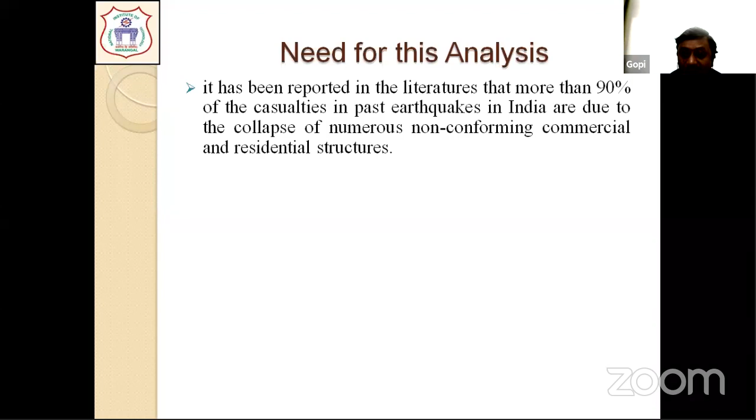We have already seen that India has experienced so many devastating earthquakes in the past, and these earthquakes have caused a lot of casualties, and that is the reason why we are very much focusing on this particular direction in order to create a safe design structure.

The only way that we can minimize this is by ensuring code compliance for new constructions, and we need to look at how our existing structures are behaving. When we are able to ascertain the performance of our existing structure, then we can decide whether we need to rehabilitate it, or retrofit it, or how to bring that structure back to the functional level according to the code of practice existing on that date when we take this analysis.

The reason here is, when we look at RC buildings, we generally have different types of RC buildings existing in urban habitat. The reason for different types is because of the inherent functional benefits that are provided by the provisions given in the RC buildings.

Say, for example, if we think of irregularities, we have different types of irregularities being introduced. Why I'm saying irregular is because it is not normal. For example, we have a provision of having an open ground story in most of our apartment complexes. This open ground story adds to a functional level of creating a parking space. But if this open ground story has not been properly taken care of while designing, this leads to a disaster during an eventuality. That we all need to understand.

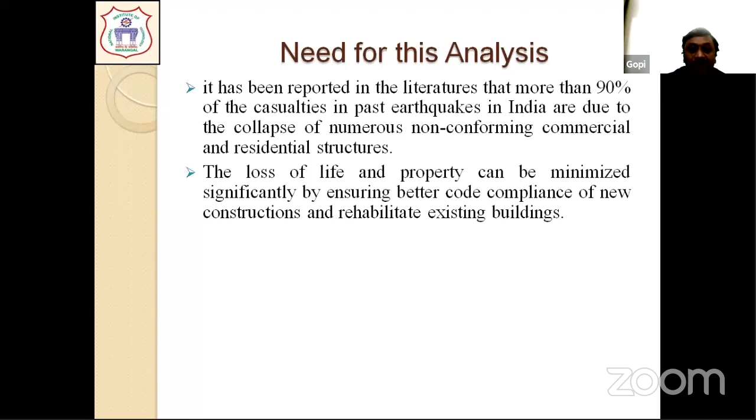designing these particular aspects. That is the reason why we are looking at what are the various analysis approaches, how we are trying to look at the behavior of these particular structures, and how we can project so that we can create awareness among people regarding the severity of this particular aspect, so that an awareness is created, and then the codal provisions can be clearly incorporated or implemented even at the site level. So that is the reason why this presentation has been framed.

So the fragility of the structure, whenever I say fragility, fragility happens to be a conditional probability. Fragility is only a probability density function which displays a conditional probability of a particular failure with respect to a parameter that is describing the failure. It is only a conditional probability.

Now coming on to the RC buildings or any structure, the response quantities for those particular structures can be acceleration, velocity, displacement, spectral acceleration, or spectral displacement. So whenever we try to describe the behavior of that particular structure, or when we try to explain the probability of exceedance, that is the way we are going to quantify the failure.

So when we are trying to explain the probability of failure with respect to certain response quantities, we are going to get a probability density function. That probability density function is nothing but a conditional probability of exceedance with respect to a particular value. So this way we can try to describe how the failure is going to happen with respect to that particular phenomena. Say for example, if we have an RC building, we may have certain properties.

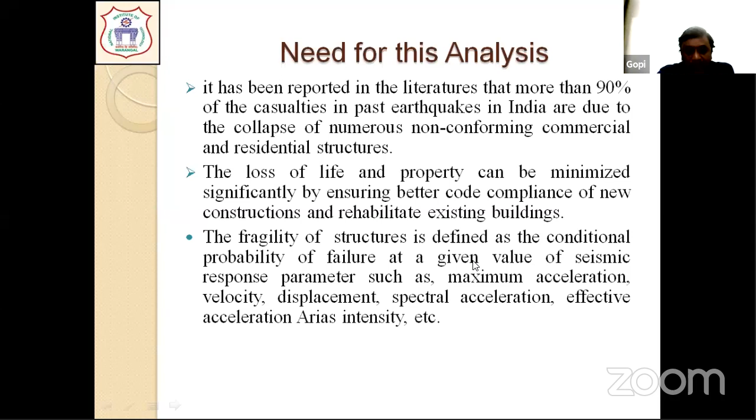Coming on to fragility functions, we've said that fragility functions happen to be conditional probability functions. So this fragility analysis is a probabilistic tool to assess the performance. What is the outcome of this analysis? We get a probability curve quantifying the damage phenomena, because we are trying to describe the failure in terms of damages incurred on an RC building. So it describes the failure in terms of a damage phenomenon.

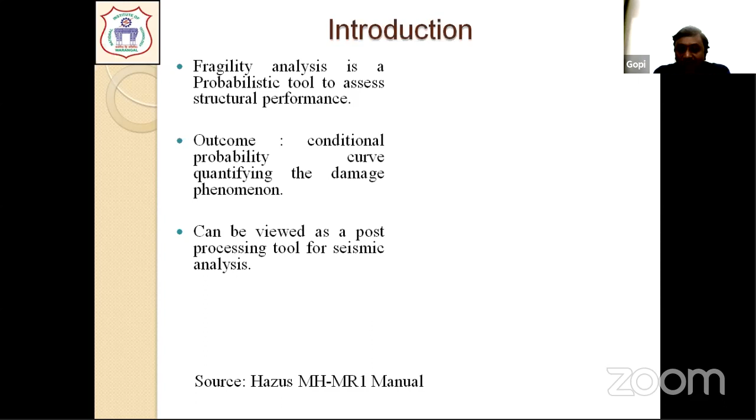So we can visualize this as a post-processing tool during seismic analysis. Please understand, it is a post-processing tool, so this tool is always dependent upon the analysis capability given to it. Otherwise, this tool is not as accurate unless the analysis procedures are accurate, and the accuracy always depends upon the type of analysis being used.

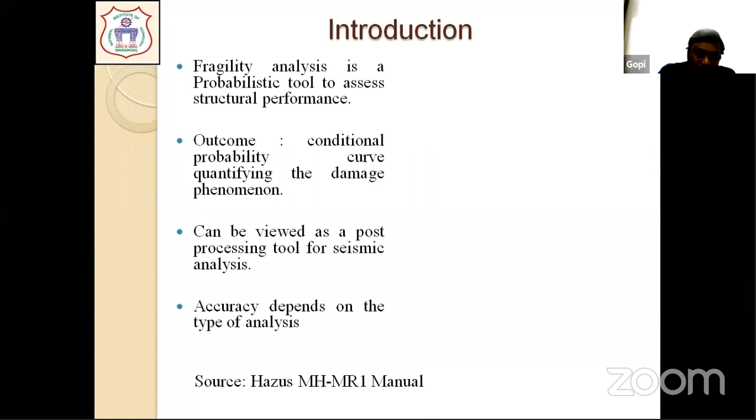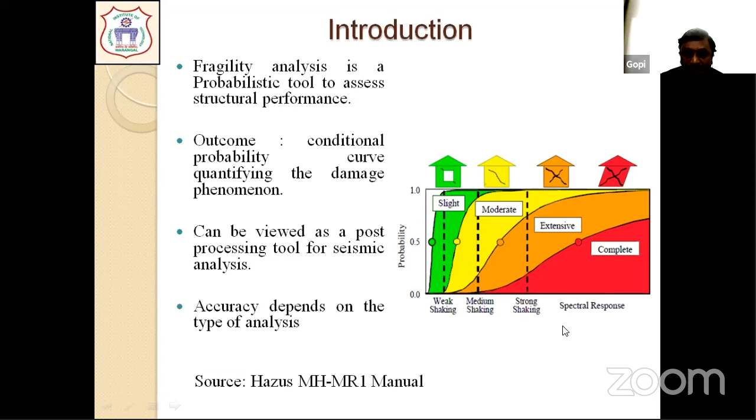The first and foremost step lies in hazard analysis. Whenever we select a particular location for analysis, we need to first ascertain the seismicity of that location, studied using either a deterministic seismic hazard analysis or a probabilistic seismic hazard analysis. We do this analysis with respect to certain intensity measures like peak ground acceleration, peak ground velocity, spectral acceleration, or spectral velocity - certain intensity measures will be framed.

Next, we are going to carry out the response analysis. That means we are characterizing the force - please understand, we are characterizing the force - and our response spectra represents the force at that particular location. Response spectra with respect to certain soil characteristics represents the force, and when we have that force, we can get the response.

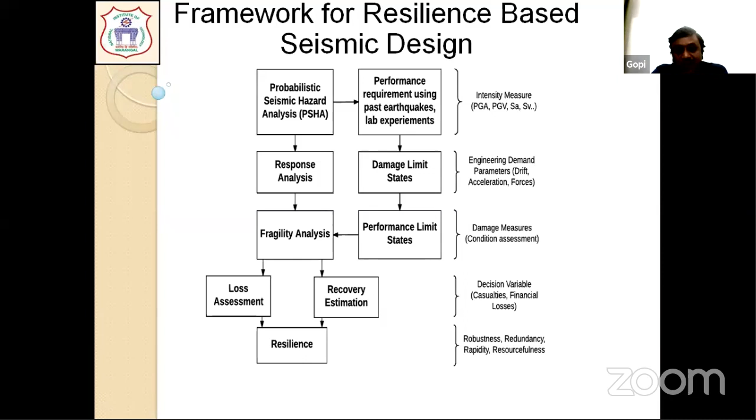Once we do this fragility analysis, we will be able to arrive at that decision. Once we arrive at it, we move to the next step - this is left to the other stakeholders, how to look at loss assessment, and whether we need to make changes to get the structure back to a functional level if it is not functional. That depends on a case-to-case basis according to the buildings being examined.

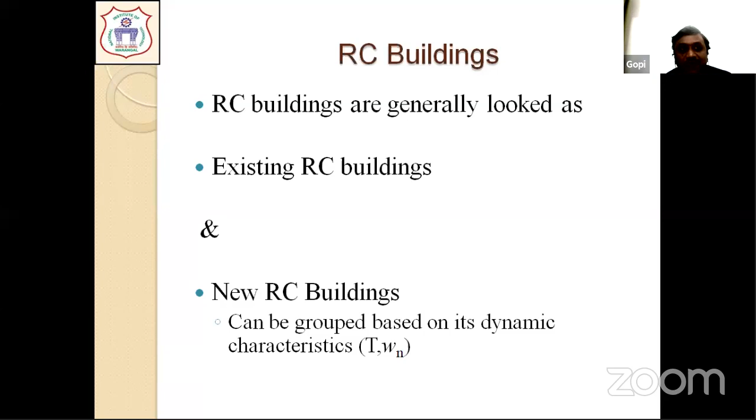As we have discussed, whenever we look at RC buildings, we generally categorize them into two types for analysis: existing RC buildings and new RC buildings. For existing RC buildings, the analysis procedure is slightly different because they already exist, so we need to examine the structure to understand its position and then see what needs to be done. For new RC buildings, we can perform the analysis directly according to the seismicity of the place, predict the expected damage pattern, arrive at the design forces, and then do the analysis.

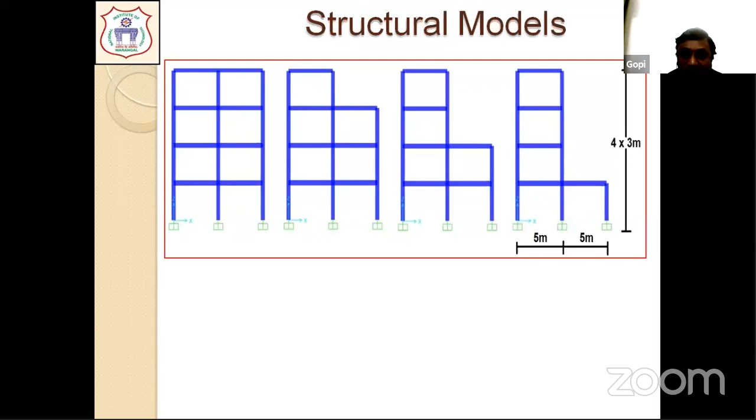When we try to look at these structures and calculate the time period, we generally group RC buildings based on their characteristics—what we call the personality traits of an RC building. We group them in terms of their time period and natural frequency. Our codal provisions give us a way to calculate the time period through an empirical equation.

If it is a bare frame building, we have a particular formula. If it's an infill frame building, we have another. But this time period formula happens to be the same for all structures, though in reality it is not so. We generally need to perform modal analysis to find the fundamental frequency and time period of structures that deviate from regular ones. Otherwise, our codal provisions almost match regular structures. In case irregularities are introduced, we need to specially account for the time period and frequency characteristics of those structures.

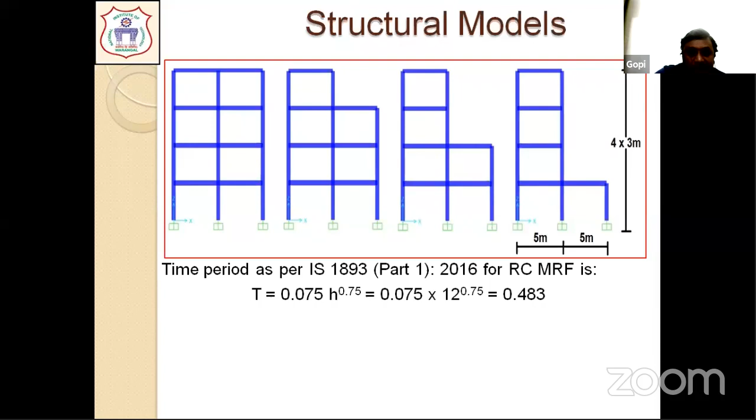Whenever we try to look at existing RC buildings, there are detailed guidelines on how to analyze them. Our IS code, IS 15988:2013, very clearly specifies various guidelines, and I'll try to explain it in brief.

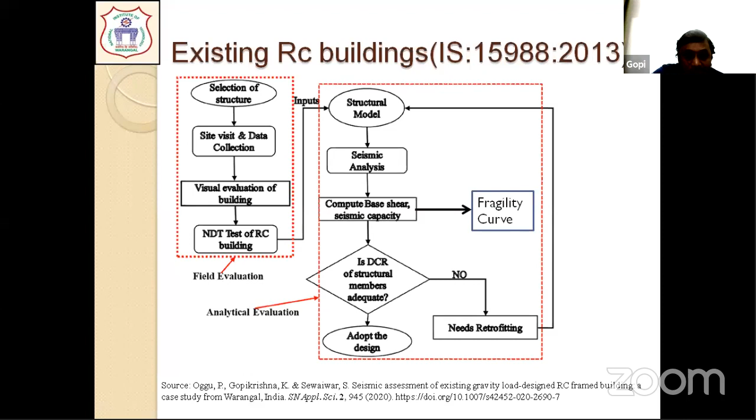We need to go for field testing and then think about how to analyze that particular structure. In field testing, we generally carry out NDT tests to analyze the structure. All the information we get from the field includes structural drawings and field tests, which give us the material characteristics and details of the rebars being used and how the reinforcement is placed. Once we get all these tests, we can use these inputs to develop an analytical model and perform the analysis to check whether it makes sense.

Otherwise, we need to cross-check our particular details. If our model matches the details we have collected, then we are going to go for further analysis.

We are going to calculate all the seismic attributes that are necessary, like the base shear and the seismic capacity. Once we understand the capacity and ascertain the demand at that particular site location based upon the response spectrum of our code, or a site-specific response spectra, then we can analyze the performance of the structure with respect to that response spectra.

So that is where fragility curves help us. Once we ascertain the performance, we look at which threshold that particular performance point is in, and how the damage probability of that structure is.

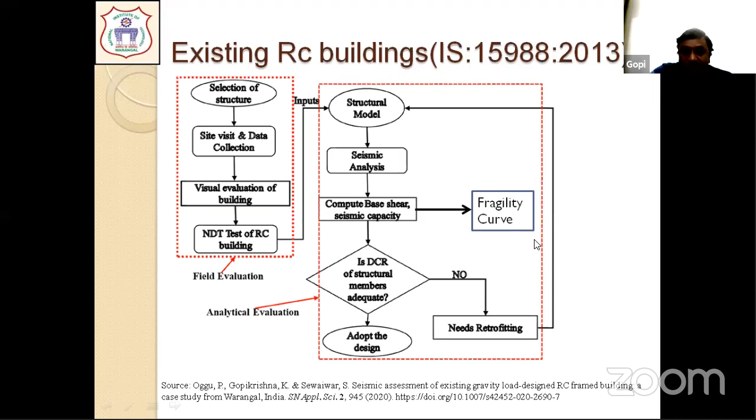Now, once we look at the analysis, that is the background of this fragility development. We should look at how we are going to develop the capacity curve. The capacity curve can be developed either using a nonlinear static analysis or a nonlinear dynamic analysis. Most commonly used is the nonlinear static analysis approach because it is easier, and only in case of important structures do we need to resort to nonlinear dynamic analysis.

In case of nonlinear static analysis, we resort to idealization of that particular structure into a single degree of freedom system. When we idealize it into a single degree of freedom system, the limitation of the nonlinear static analysis happens to be the fundamental mode of vibration of that structure. Whenever we have any multi-storied structure, and if the fundamental mode of vibration is dominant, then nonlinear static analysis happens to be one of the most accurate approaches.

So there is no need for us to always resort to dynamic analysis for our results. We can look at the nonlinear static analysis approach and understand how the structure is being pushed from the elastic zone to the inelastic zone, incorporating all the material models onto it.

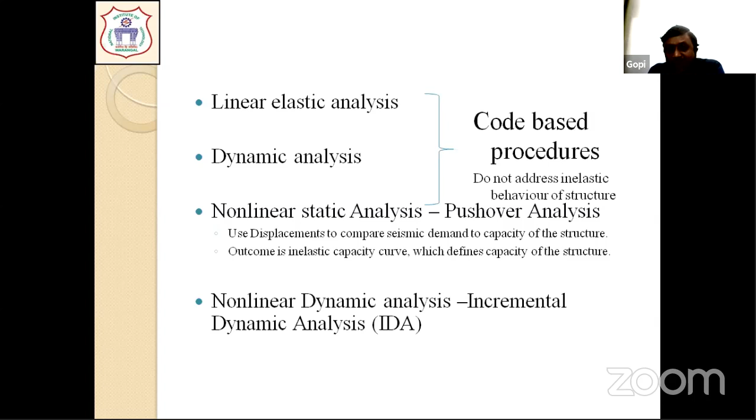So these analyses are being performed to develop the capacity curve. There are several structural softwares available right now which directly perform this analysis and give us the capacity curve. The most popularly used software is SAP 2000, where we get the capacity curve once we incorporate the response spectrum.

Once we incorporate the response spectrum, we get the capacity curve. Capacity curve is nothing but the maximum base shear which that particular structure experiences. So the capacity curve is nothing but a force deflection curve, and this curve represents the capacity in terms of base shear. Base shear is the maximum dynamic force which a structure attracts.

So the base shear differs from structure to structure. Whenever we do this particular analysis, we get a load deflection curve in terms of base shear versus displacement. That is the maximum force which any structure can experience.

So that particular structure can experience a maximum base shear, and that base shear is being distributed among different floor levels according to the procedures given in our code. So we distribute according to the different floor levels, and then we try to see the response characteristics.

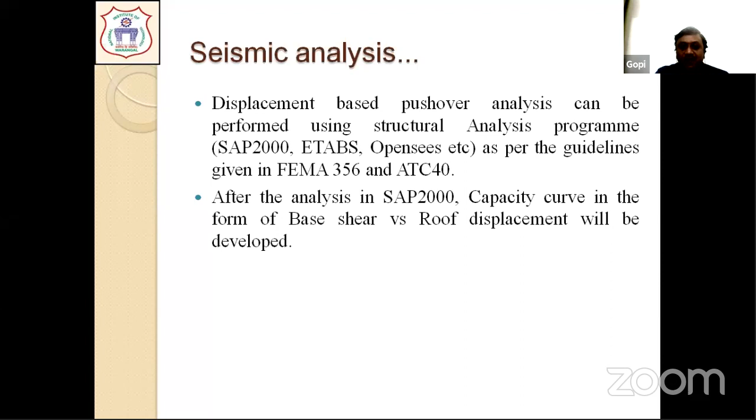In case of nonlinear static analysis, we try to push these forces according to a predefined pattern. So with respect to a predefined pattern, we try to push it and then look at how the response quantities vary from elastic range to inelastic range until collapse. So that is how we describe the capacity of that particular structure.

And once we define the capacity, we all know that the demand is being specified, and whenever we look at the demand and the capacity, we can arrive at the performance point. So our ATC 40 describes three procedures to look at how to convert this capacity curve and demand curve onto the same axis.

So we are converting that into ADRS format, that is acceleration, displacement, response spectra. We are converting our demand, which will be in SA versus T, and then our response, which can be displacement or any other quantity, so we are trying to express our response in terms of capacity, which happens to be our base shear versus

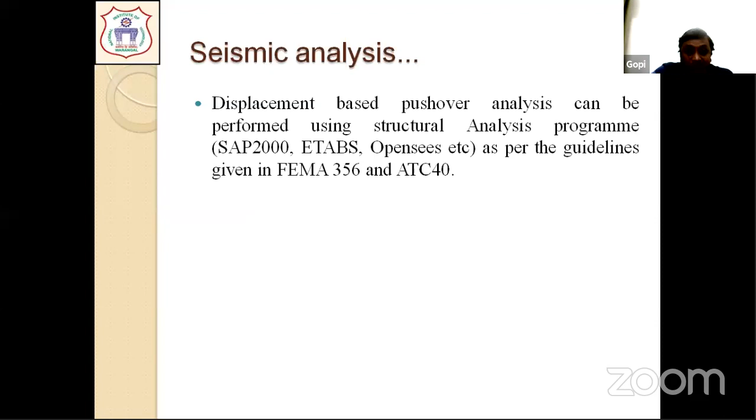spectral displacement. So what we are trying to do is bring these two dissimilar quantities onto the same platform, onto the same axis, which is acceleration versus displacement quantity.

So we are converting this, and this conversion uses an idealization that this behaves as a single degree of freedom system. The pseudospectral velocity or pseudospectral acceleration given to convert these quantities is based upon the idealization that the fundamental mode of vibration is dominant. Considering that aspect, the conversion has been given in order to visualize the performance point. So for structures where the fundamental mode of vibration is dominant, this analysis happens to be accurate enough.

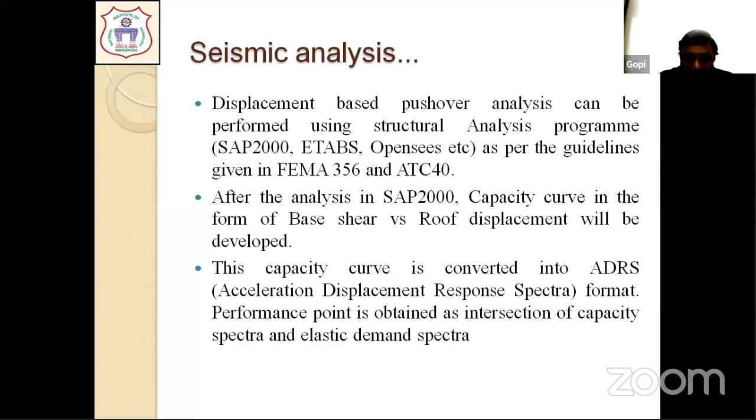So if we look at the seismic analysis, this is where we draw the capacity curve. And once the capacity curve has been obtained, if it happens to be a new structure, we will have different control points on the capacity curve. Based upon the control points, we will be looking at the fragility curves.

This fragility curve is not a new one. It has been in existence since 1980, where it was described as a probabilistic relation between the frequency of failure of a component in a nuclear power plant with respect to peak ground acceleration.

And when we look at earthquakes, we try to look at the failure of an RC structure with respect to an intensity measure. Intensity measure can be the ground parameter, which is peak ground acceleration, or it can be spectral acceleration. So we are describing the failure of an RC building or its performance with respect to these intensity measures.

Probability of failure with respect to these intensity measures. And the fragility curve happens to be a graphical representation which shows the probability of exceeding different damage states.

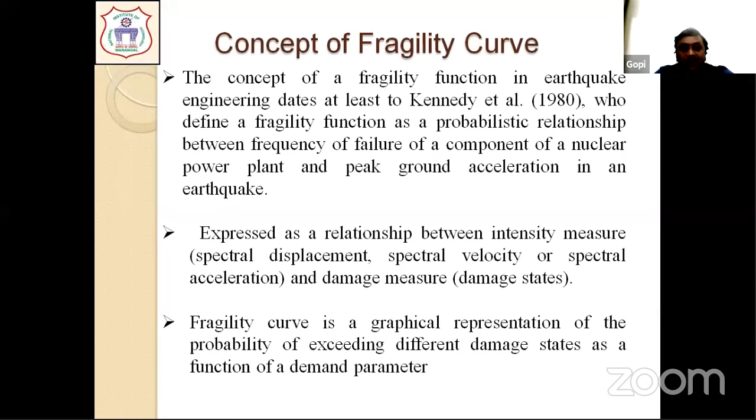Now, if we look at the way this particular flowchart describes the entire analysis that is necessary for us to look up to the fragility estimation: first, in terms of an RC building, we select the building and idealize that particular building in terms of a single degree of freedom system.

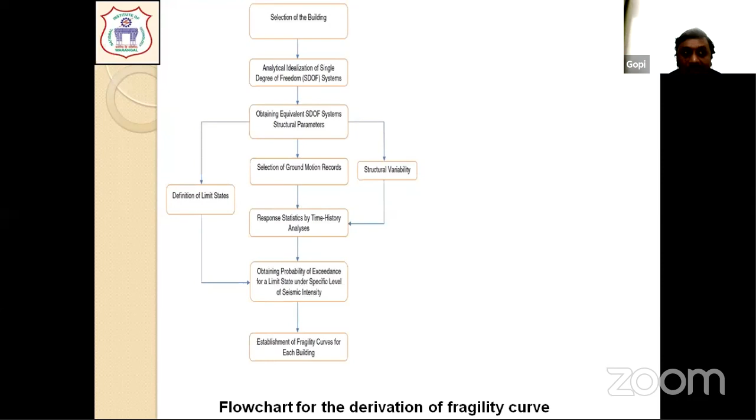Then we take the hazard analysis report, calculate the response quantities for that particular hazard, and define the performance limit states, and then try to describe this structure with respect to those limit states.

I can put this entire flowchart into 4 steps. First, we have hazard analysis and response analysis for that particular hazard - that is the preliminary step. We need to select the structure, understand what is the hazard at that particular place, and understand what is the response of that particular structure with respect to hazard.

Once we know the response, it will be in terms of capacity of that particular structure, that is base shear versus displacement. And when we try to look at the demand and the capacity, these are the demands and this is the capacity of that particular structure for that particular demand.

When this demand and capacity has been overlaid in ADRS format, we arrive at a particular intersection point called the performance point, and we look at where this performance point is with respect to the performance limits that are being defined for the capacity curve.

Based upon that performance limits, we look at how this damage or failure of the structure can be described with respect to various damage thresholds that we have. We generally define qualitatively as slight, moderate, extensive, complete. These qualitative terms will be quantified with respect to certain values, and these curves try to describe them in a quantitative form.

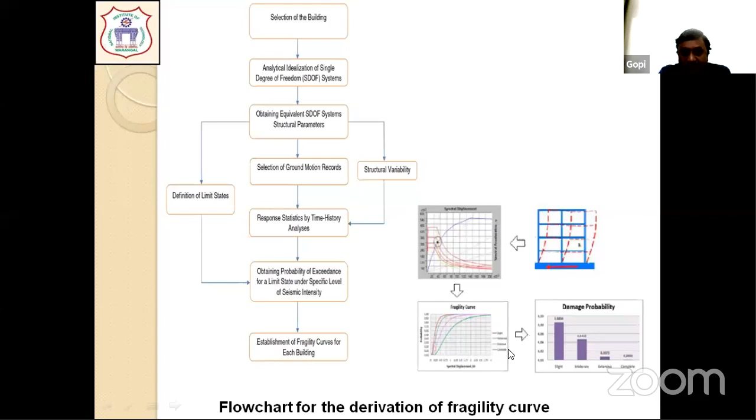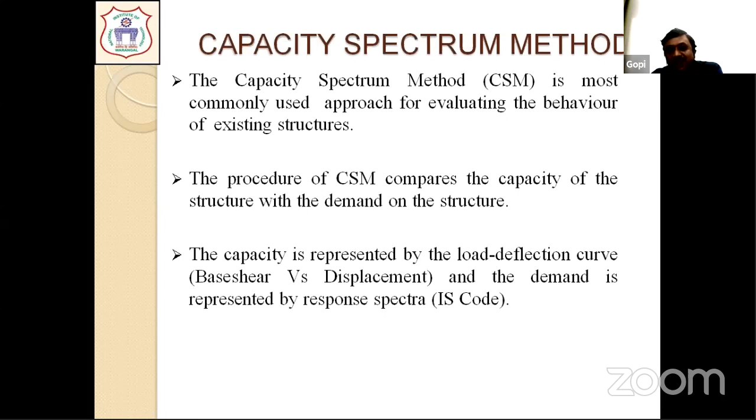Now, this capacity spectrum method has been described in ATC 40, and this procedure describes the capacity with respect to demand, and the intersection gives us the performance point as we have seen earlier. The plot between base shear and roof displacement is what we call capacity.

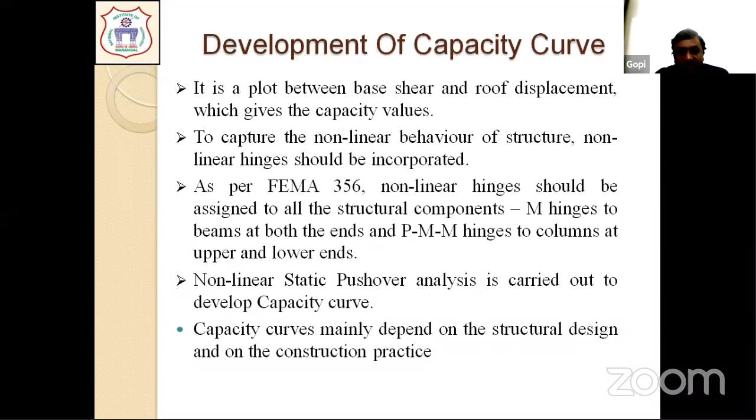In order to arrive at this capacity, we need to describe the hinge behavior when performing the nonlinear static analysis as per the FEMA guidelines. Those hinges need to be defined, and accordingly we arrive at the capacity, performing the nonlinear static analysis to arrive at the capacity curve of the structure under consideration.

Once we get the capacity curve, the important things in the capacity curve are the yield displacement and the ultimate displacement. So we need a procedure in which we can identify the yield and identify the ultimate.

ATC 40 describes procedures as to how to look at the curve in a bilinear form and then arrive at the yield displacement and arrive at the ultimate displacement.

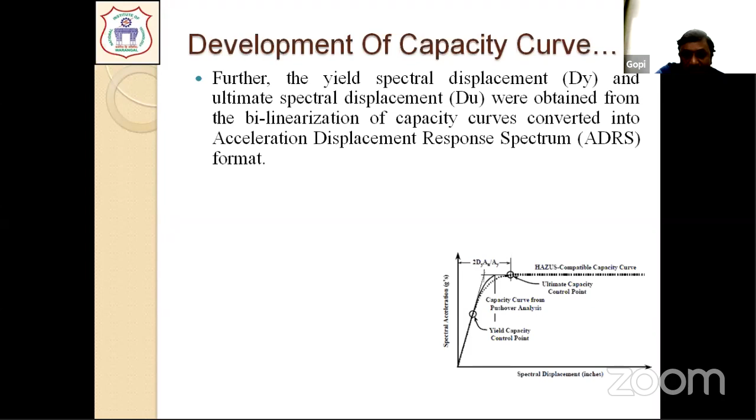So whenever we have a capacity curve defined like this, we have a yield capacity here and an ultimate capacity defined here. There are certain formulas which try to tell us how to identify this ultimate capacity.

This will be the ultimate capacity, described in terms of spectral acceleration versus spectral displacement. So for a particular spectral displacement value, we need to calculate whether this corresponds to the spectral displacement and what is the corresponding spectral acceleration for which this structure has an ultimate displacement.

This happens to be the yield displacement. This is how we are going to arrive at the capacity. Our HAZUS manual describes the equations to calculate the yield and ultimate capacity.

Once we calculate the yield and ultimate capacity, we can define the damage threshold values between the yield and ultimate, and then describe how the behavior of this structure is between the yield and ultimate displacements.

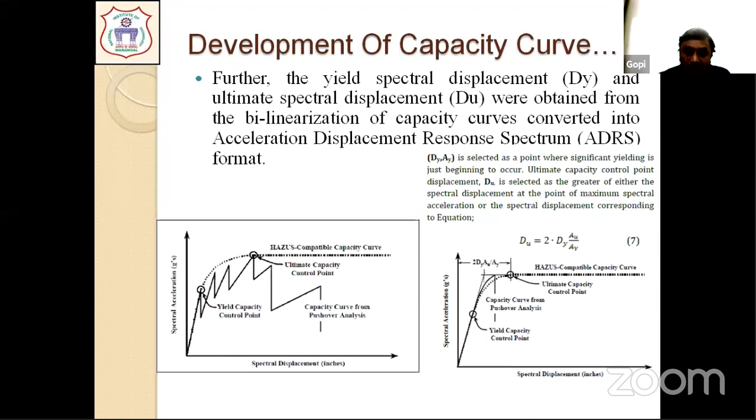So we need to resort to dynamic analysis. Whenever we resort to dynamic analysis, we have something called the incremental dynamic analysis procedure, which we utilize to arrive at the capacity curve. So from analysis we get the capacity curve, and from the capacity curve we use fragility analysis to project the behavior of this structure - what is the probability of failure for various damage thresholds that are defined.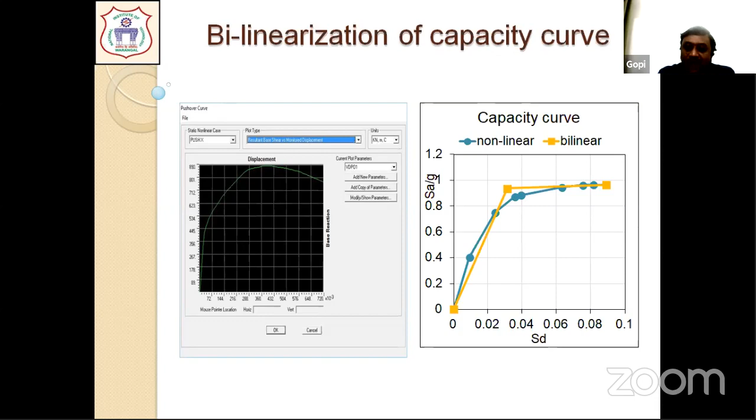These are the steps available. We generally have a demand spectra, which is spectral acceleration versus time period. We convert this into spectral acceleration versus spectral displacement. Similarly, we get the capacity curve from nonlinear static analysis, which is base shear versus roof displacement or something like that - so we get a force versus displacement curve.

Once we get this capacity curve, we convert it into acceleration versus displacement format using our modal participation factor and mode shapes. We convert this pushover curve or capacity curve obtained from nonlinear static analysis into acceleration versus displacement format based upon the first mode representation. Please understand, it is based upon the first mode - only the fundamental mode is considered here.

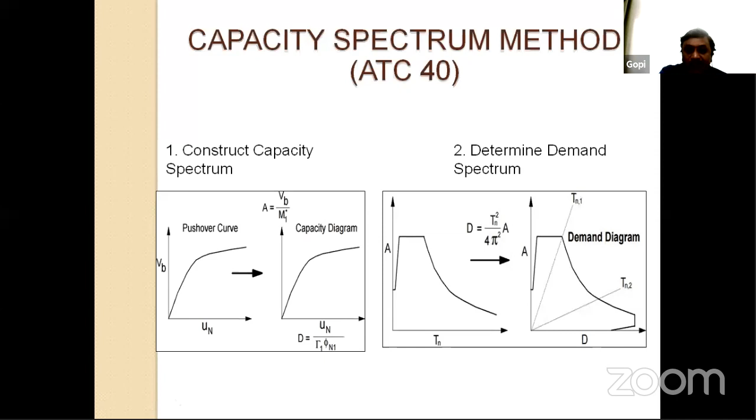Then we look at the intersection of the demand curve with the capacity curve, and we arrive at a performance point in case of an existing structure. We look at what displacement and what spectral acceleration this particular structure is performing at, and we locate where that performance point is.

We define threshold levels like immediate occupancy, life safety, collapse prevention. We look at which particular zone this performance point falls in - is it immediate occupancy, life safety, collapse prevention, or has it reached collapse? So we have certain limits to quantify this capacity curve between yield and ultimate, and between yield and ultimate we define these performance levels.

Once we analyze an existing structure, we know the performance point, and the performance point of the existing RC building tells us exactly where it is right now. This performance point tells us whether we need to improve this structure, or whether the existing structure can continue as is for future eventualities. So this performance point helps us take a decision.

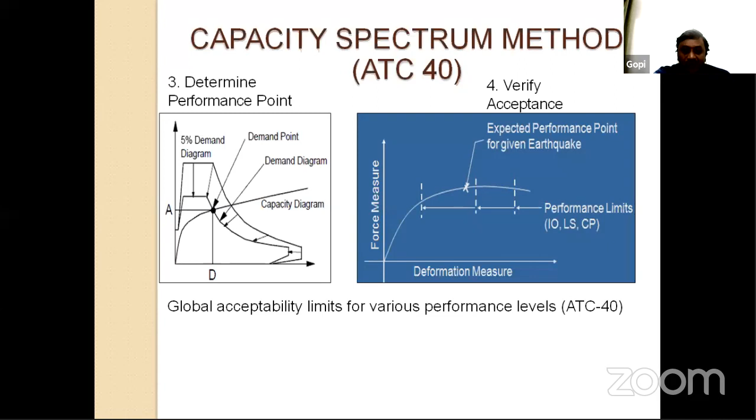In order to quantify these threshold limits, we have certain defined limits: immediate occupancy level, damage control level, life safety level, collapse prevention level. These levels have been defined as per ATC 40, so that we can quantify between yield and the ultimate displacement.

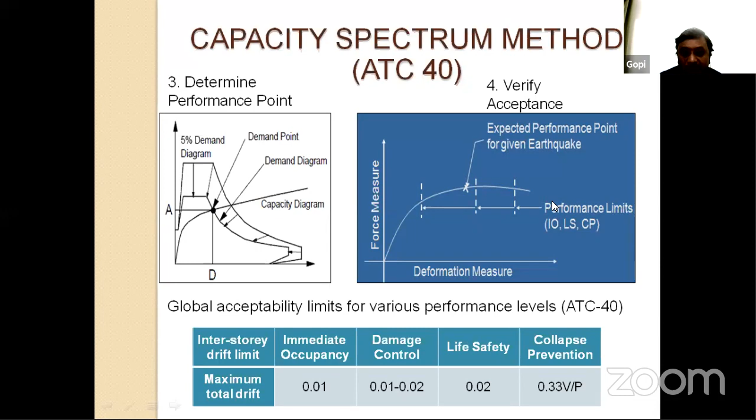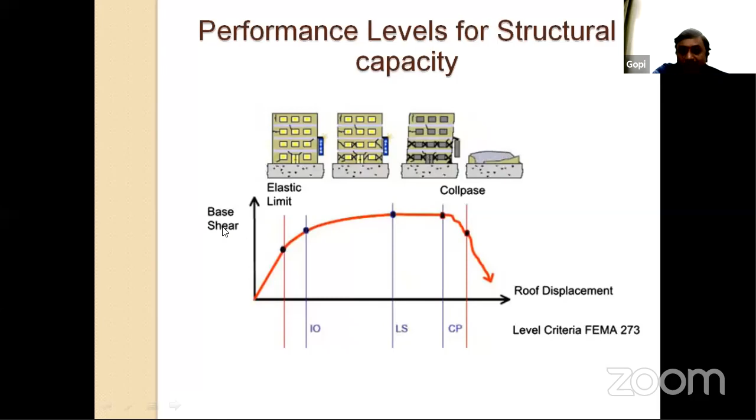Please understand, collapse doesn't mean that an RC structure has already failed. We are defining the limits and trying to describe the failure with respect to those particular limits.

Now, coming on to another analysis, we have seen till now nonlinear static analysis to define a capacity curve, and this has certain limitations, since only the fundamental mode of vibration is used. So another analysis we can use is incremental dynamic analysis, popularly called IDA, to overcome these limitations. It was proposed by Cornell.

In this analysis, the first thing we need to do is select a set of accelerograms, depending upon certain criteria pertaining to that particular site conditions, so that they take care of the uncertainties present in the site conditions.

Suppose we have accelerograms pertaining to that particular location, we can directly select it. Or we have to select accelerograms pertaining to certain earthquakes which have already occurred in the database, which nearly match the site location, or we can select according to criteria like earthquake magnitude or source to site distance, or whether it is a near fault or a far away fault.

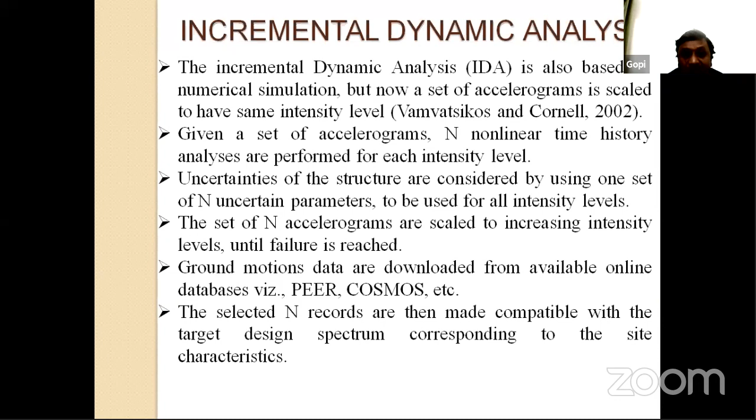We need to look at which scaling, or which particular spectral acceleration, moves this structure from one zone to another, say elastic to plastic, to until collapse state. So depending upon the scaling of each accelerogram, we get a capacity curve. Based upon the accelerograms selected and their scaling, we get one capacity curve for each accelerogram. And based upon those records, we look at the mean capacity curve, which appropriately defines the capacity. Once we take that mean capacity curve, the rest of the procedure is the same.

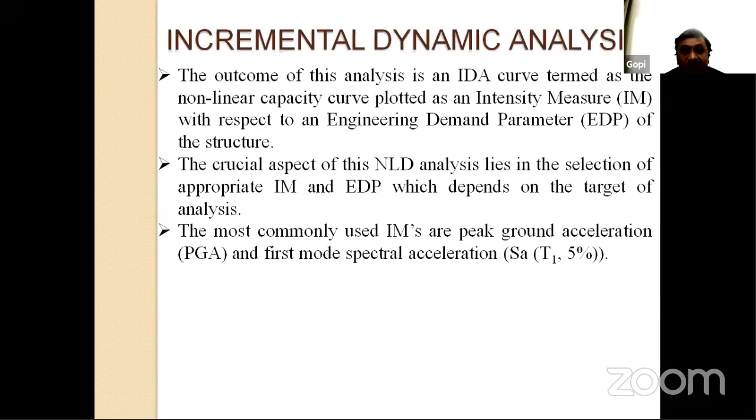That is how we are going to define the capacity with respect to incremental dynamic analysis. In this incremental dynamic analysis, the main idea is we will be describing it with respect to an engineering demand parameter, which we call EDP.

It can be a spectral acceleration, a PGA, spectral acceleration pertaining to the first mode, or SA average. These are different intensity measures we generally use to describe the capacity of that particular structure. Once we arrive at the capacity, the rest of the procedure is the same, whether we are going with nonlinear static analysis or dynamic analysis for generating the capacity.

Once the capacity of that particular structure is generated, we go with the analysis. This is how we generally create a spectrum-compatible accelerogram from the various accelerograms selected with respect to the target elastic spectrum specified by the code.

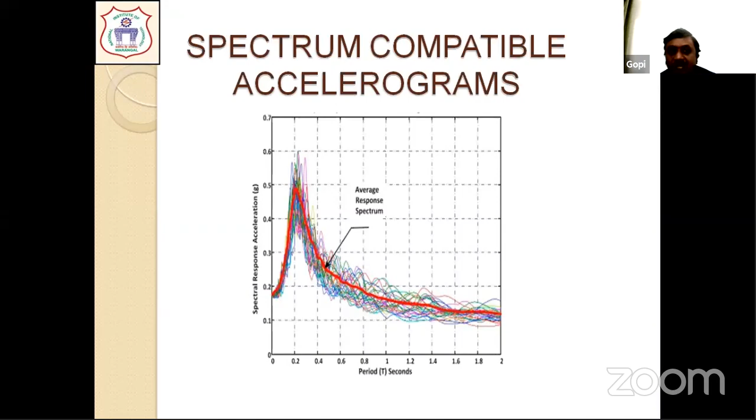Then we generate the capacity curve like this, and we look at different ways of looking at the capacity, whether it is 16th fractile, 50th fractile, or 84th fractile. That is how we generate the capacity of that particular structure.

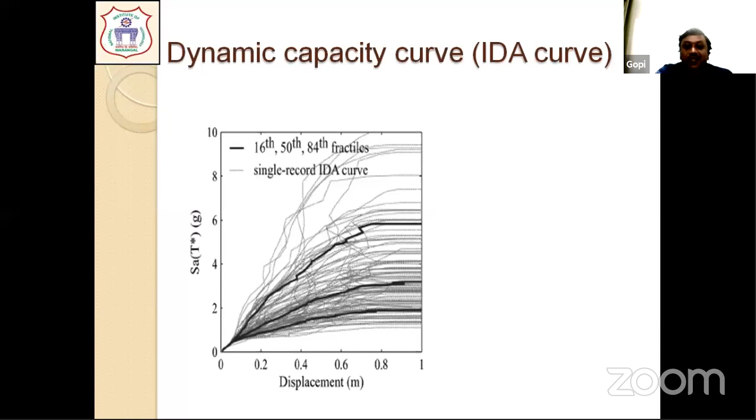Once we look at that, this happens to be the capacity curve. Please look at this, these are the capacity curves. Once we know the capacity curve, we will be defining the damage thresholds on it and try to look at the behavior of this particular structure, the damage probabilities for the damage thresholds it is likely to encounter.

How are we going to look at the fragility estimation once the capacity curve has been developed? HAZUS has given us the simplest methodology in order to visualize the fragility curve. This is most widely used, most widely adopted, and has been accurate enough to describe the damage probabilities of that particular structure after generating the capacity curve.

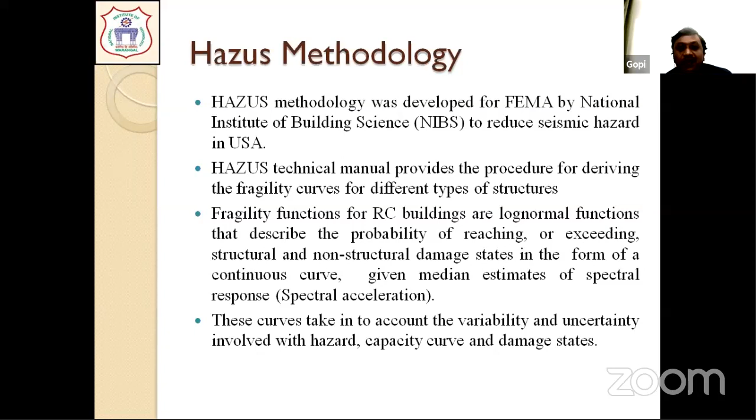These curves take into account the variability and uncertainties involved with respect to the parameters, hazard and response parameters. And we will be defining the damage states like this.

If we can recall, our capacity curve contains the yield and then the ultimate point. Once we know the yield and ultimate, we will be defining the different damage thresholds like slight, moderate, extensive, complete. There are empirical equations which correspond to those damage states.

For the slight damage state, we can define an empirical equation like this, and similarly for the moderate damage state. HAZUS has given us these particular empirical equations to define these damage thresholds. Once we define these damage thresholds for a particular capacity curve of a particular structure obtained from the analysis, we can draw the fragility curves for these damage threshold values to describe the probability of failure of that particular structure.

So we can look here, this is how the damage thresholds are. Whichever I have given here in empirical equation form, I am showing it in a graphical representation. This happens to be our bilinear capacity curve, and we will be having the different thresholds SD1, SD2, SD3, SD4.

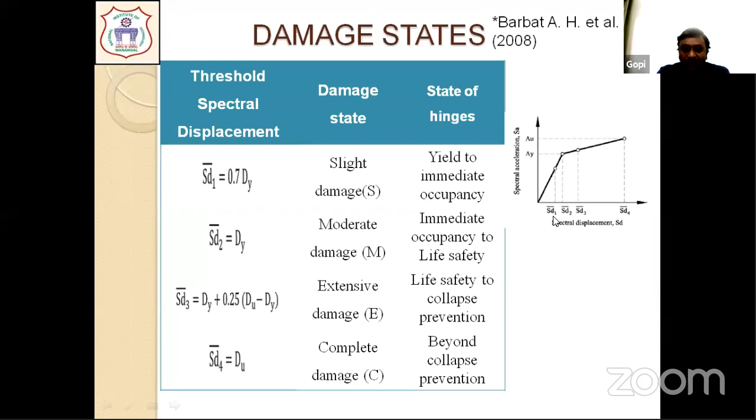Once we define that particular damage threshold, you can very clearly look here. This happens to be the basic equation for drawing the fragility curve. This is a conditional probability function where the probability of a damage state with respect to a spectral displacement is defined as a normal, log-normal probability distribution.

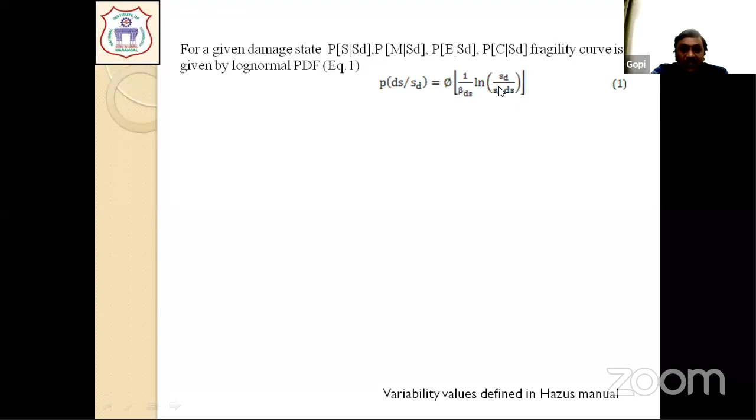This happens to be the probability density function describing the behavior of that particular structure. Once we know the spectral displacements, once we know the damage thresholds, once we can estimate this particular beta, which is given to us by the HAZUS manual, we can utilize this equation in order to generate our fragility curve.

So we will be having these values which are specified, and we can draw a curve something like this. These are the damage thresholds SD1, SD2, SD3, SD4, specified by the HAZUS manual. We can generate these depending upon the damage thresholds, and this is how we generally describe the behavior of any particular structure.

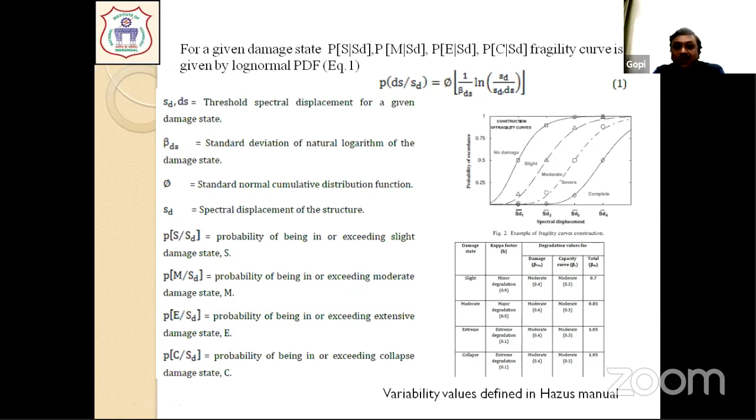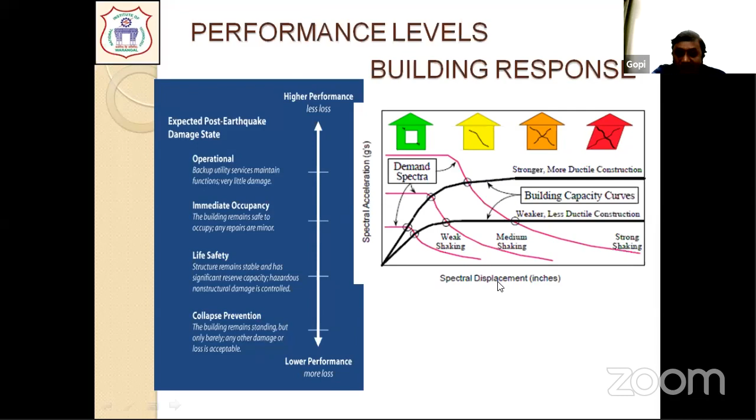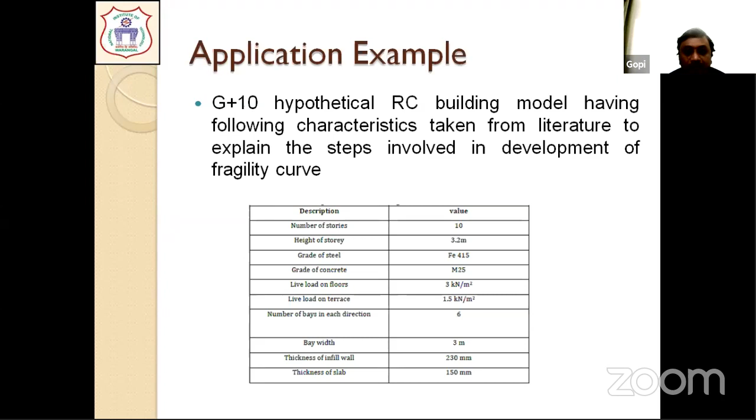Now, I have taken an example from the literature to show you the steps we generally carry out. It happens to be a 10-story building with certain characteristics. This is how we generate a structural model.

Once we generate a structural model with appropriate material models and characteristics, we perform a nonlinear static analysis so that we can generate the capacity curve. This is how we generate a capacity curve in a structural software - we can use SAP, ETABS, OpenSees, or any other available software. So it generates this particular capacity curve.

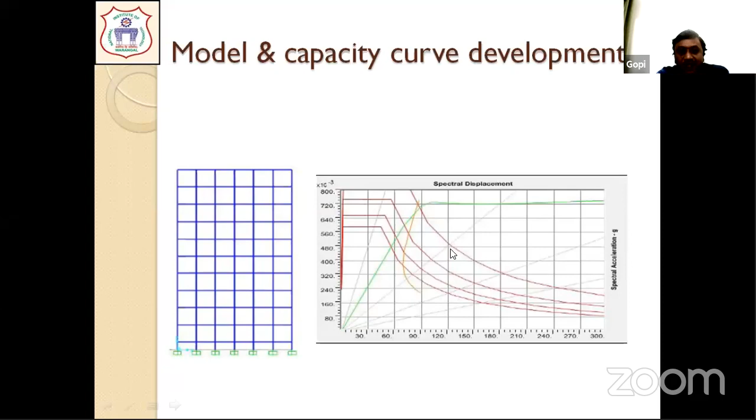This happens to be the capacity curve, and these are the demand curves used for different damping levels. Once we generate this capacity curve, we calculate the yield and the ultimate points in the curve - what is the yield spectral displacement and what is the ultimate spectral displacement.

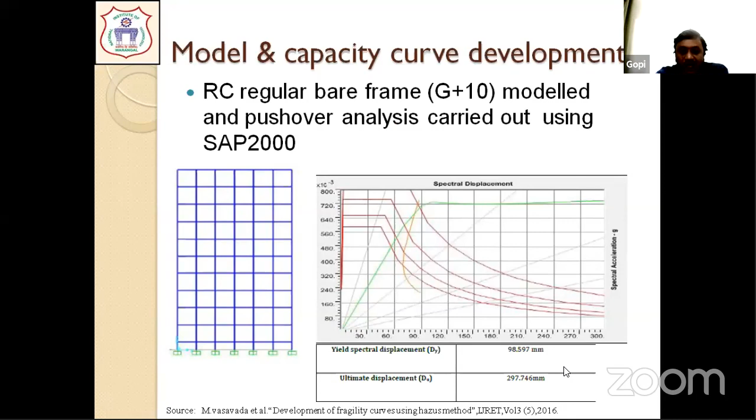Once we calculate the yield and ultimate spectral displacements, we know the threshold values that are given. The slight threshold value is 0.7 times yield, moderate is yield, extensive is a further value, and collapse is nothing but the ultimate.

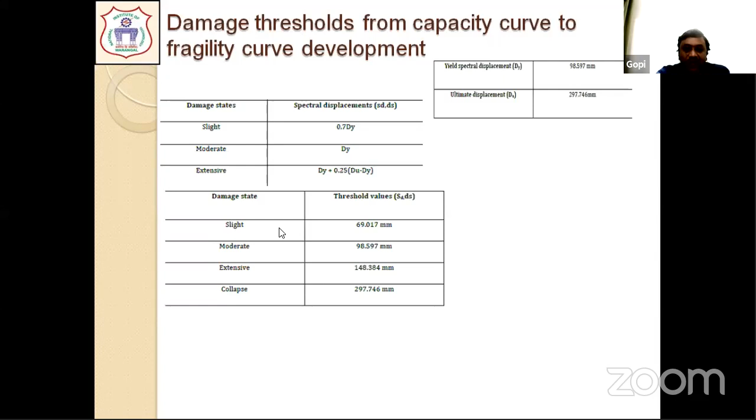So we know the yield displacement and the ultimate displacement, so we can calculate these threshold values. For a particular capacity curve, we arrive at these threshold values: slight threshold is this, moderate threshold is this, extensive threshold is this, and collapse is this.

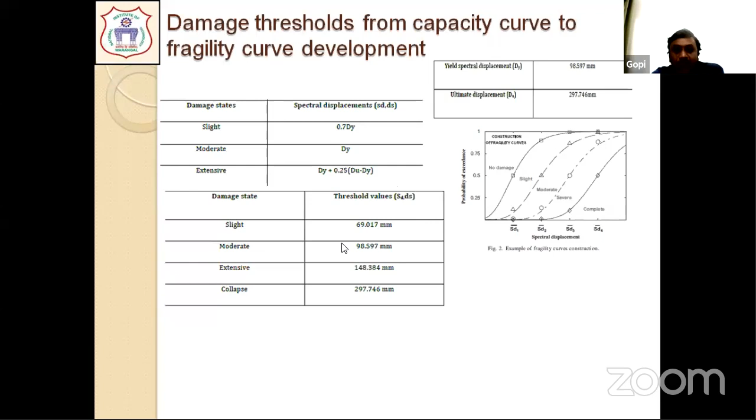Then utilizing these threshold values - SD1, SD2, SD3, SD4 - we can generate this particular curve, showing the behavior of the structure in different damage states. This is how we draw the fragility curve for various damage states.

For another example, we take infill walls, whereas earlier we had taken a bare frame. With the infill wall, we need to model it in terms of an axial hinge. The diagonal strut model is taken to be accurate enough, and if we model this as an axial hinge in SAP, we arrive at describing the characteristics of this particular diagonal strut.

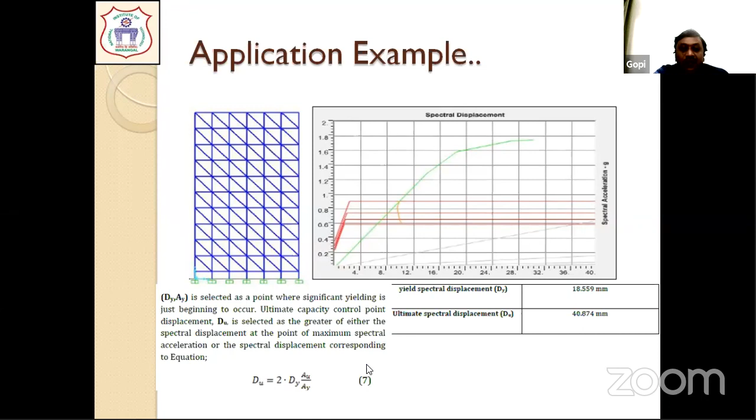Once we perform the analysis, we arrive at this capacity curve - the capacity of the same structure when the infill has been added. We have a yield displacement and an ultimate displacement here. Once we calculate the yield and ultimate displacement, we use certain norm equations specified to calculate the yield and ultimate as per the HAZUS manual.

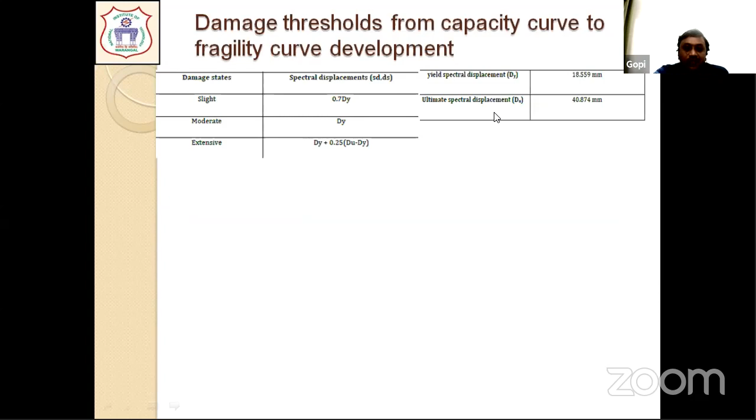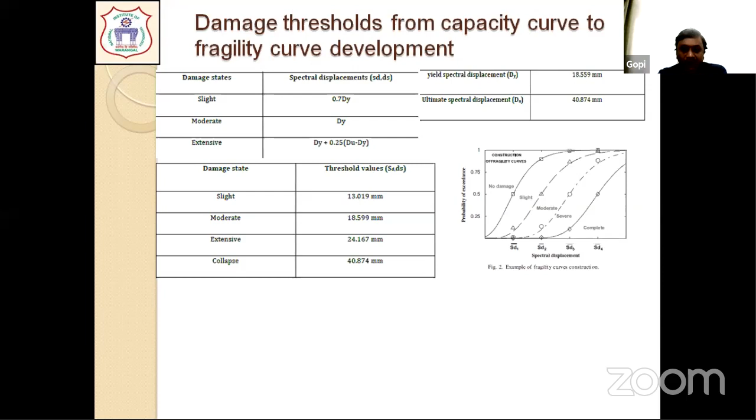Once we calculate the yield and ultimate, we arrive at the damage threshold values as described earlier - we have damage threshold values, we know yield, we know ultimate. Then we calculate the damage states and threshold values, and accordingly describe the fragility curve in this form, generated for all the damage threshold values based on the probability density function equation.

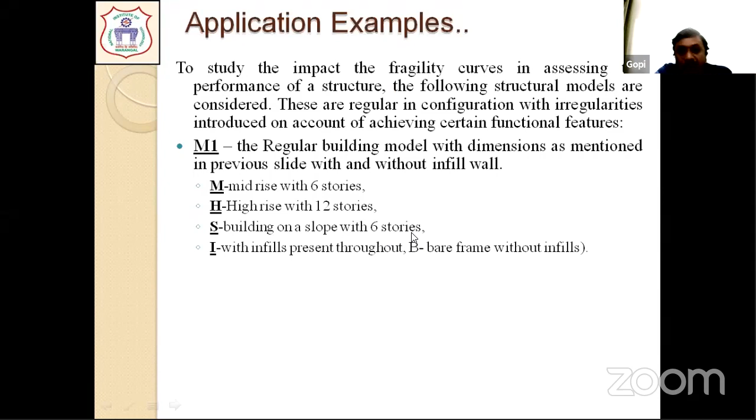To study the impact of the fragility curves, we modeled a regular building with a mid-rise of 6 stories, a high-rise of 12 stories, and a building with a slope of 6 stories. This happens to be from our published paper on fragility analysis - one open ground story building complex, and a model where we try to remove a critical column to see how the structure behaves.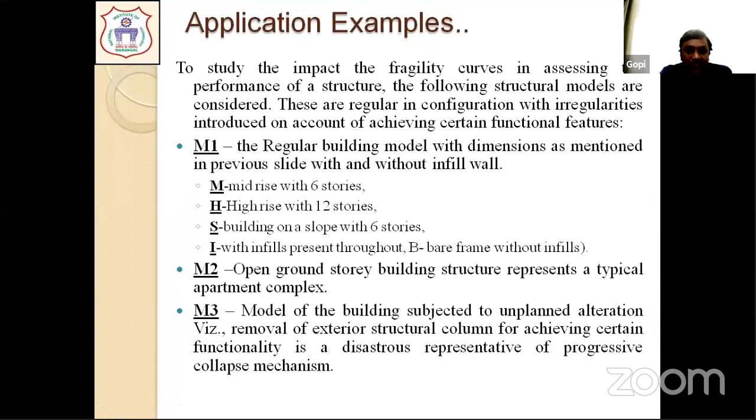When we did this analysis, these are the various structural models generated: a high-rise bare frame building, one with infill, an open ground story building, and mid-rise buildings with a bare frame and with infill.

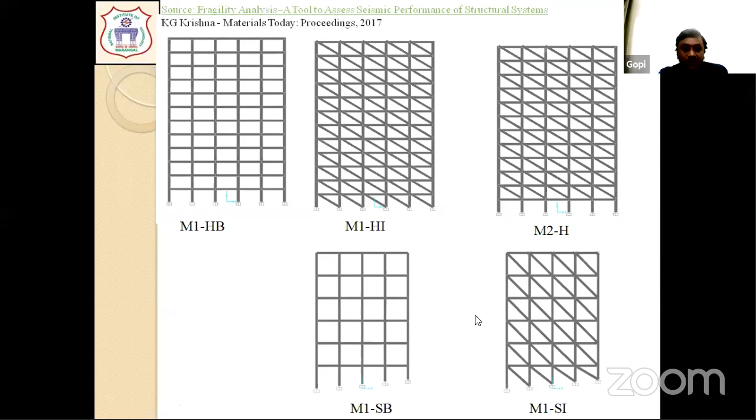These are certain representative scenarios. We can perform the analysis for any scenario we encounter and look at the structural behavior.

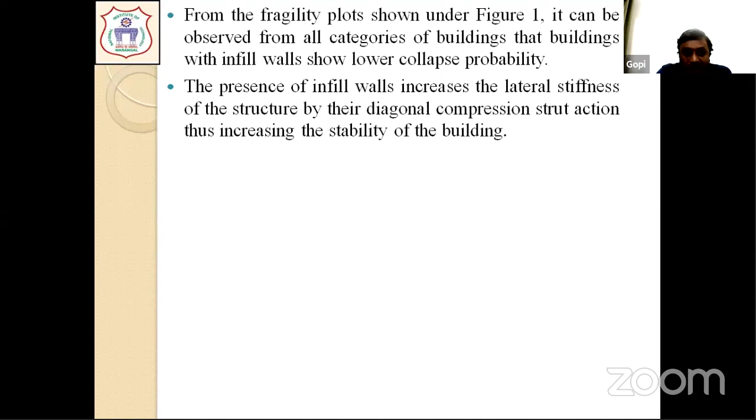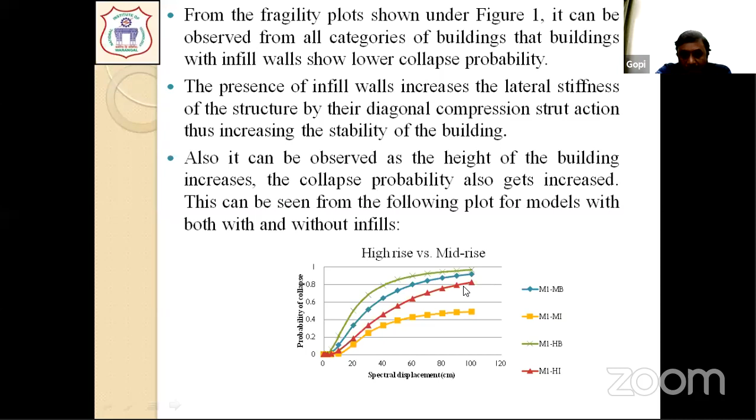Here we have shown results for the infill wall and the bare frame. These are the infill wall analyses and these are the bare frame analyses. We can clearly see that the failure probability of the infill wall is very low compared to the bare frame, but the lateral stiffness of the structure increases when the infill is added, because of the interaction of the infill wall with the bare frame. So the collapse probability of the infill wall decreases compared to the bare frame.

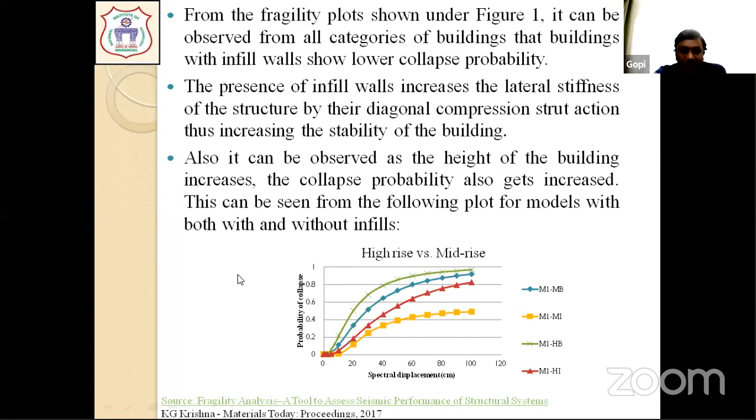Like this, we can perform several types of analysis to look at the behavior of a particular structure. The fragility curves really help us visualize this behavior, so I could say fragility curves are an impeccable tool to describe structural performance.

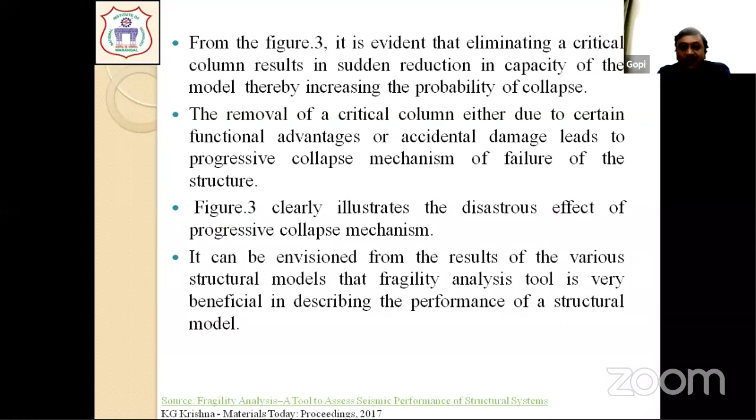We could clearly see that the fragility analysis tool has been very beneficial in describing the performance. Based upon that performance, it will help decision makers take a decision based upon the performance of that particular structure.

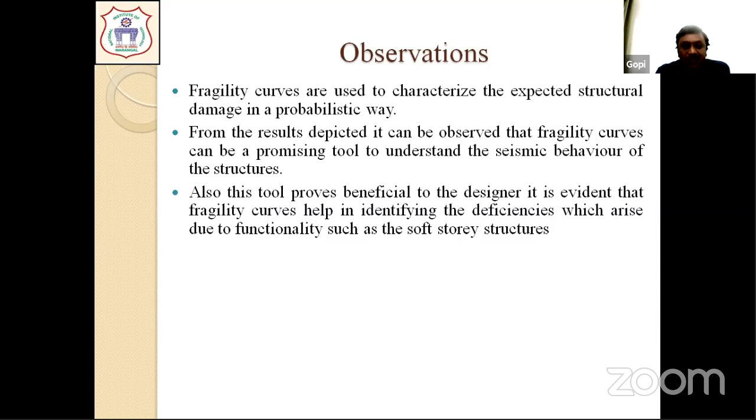Coming to the observations we have seen till now: fragility curves are used to characterize structural behavior in a probabilistic form, and it appears to be a promising tool to understand seismic behavior. This tool will be beneficial to the designer to understand the inherent deficiencies of a particular structure, and then to design ways to overcome that.

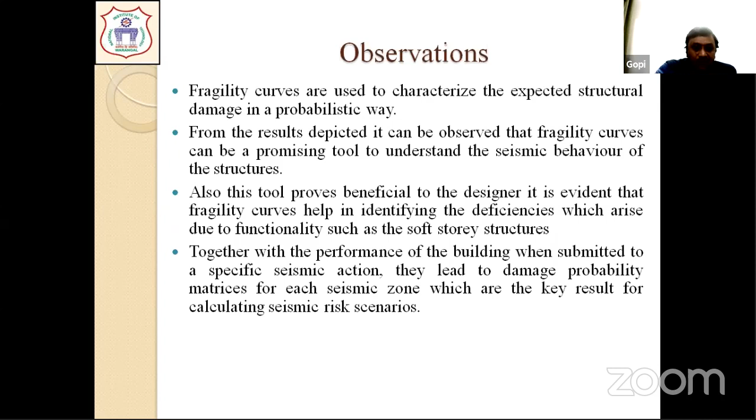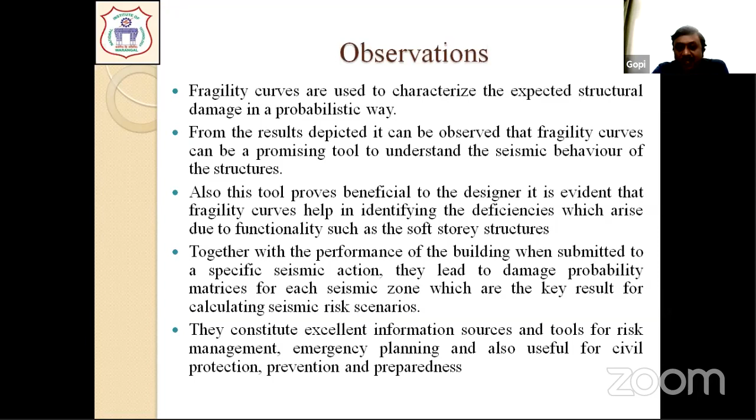This fragility analysis constitutes an excellent information source and tool for emergency planning, and it will be useful for protection, prevention, and preparedness in case of an eventuality. That is what we need to do in case of an eventuality which we cannot avoid. Whenever we have a disaster or hazard which we cannot avoid, the only thing we can do is mitigate it. So we need tools which give us information so that we can try to mitigate that particular hazard.

So I think this is all from my side.